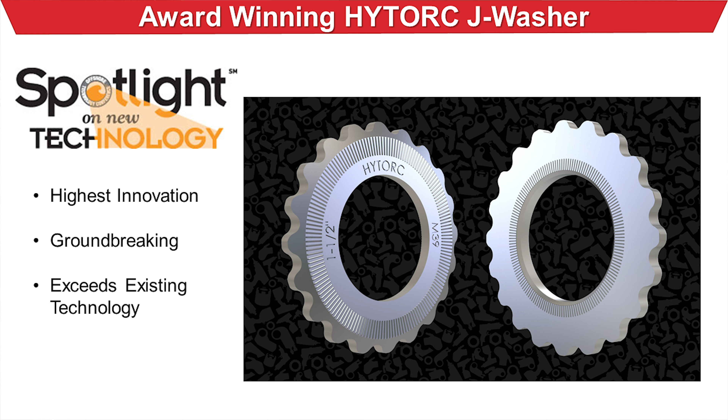Yeah, it's a product that we're really proud of, and it's actually our second Spotlight on New Technology Award. We won it for our LST battery tool in 2019, the last live show, and now we've won it for our washer, and it's a really prestigious award and one that we're extremely proud of as an organization.

Our team has put so much time and effort into developing these products that make a significant impact on industry. I mean, that's what we're all about. We take in feedback from our customers and put it into practice with our product development, with the support resources that we have. And it's just terrific to see it recognized by such a prestigious group.

To be surrounded by the who's who of companies in the oil and gas industry - it was a great experience, and we're truly honored by it. Two out of the last three years to bring home that piece of hardware.

Certainly impressive. Eric, let's learn more about the J-Washer. Take us through this and, of course, the benefits that it has for those customers that are using it. Yeah, as you can see on the screen here, it's showing just how it looks and its appearance.

You have on the left what many have become familiar with. This is our HYTORC washer system. And so just to give a little bit of background, we started making washers about 20 years ago or so. Our first iteration of the HYTORC washer was developed in the early 2000s.

The idea was how can we enhance the industrial bolting game? How can we improve things? Again, job safety, job quality, reducing job time, really just making bolting simpler and better. And so we developed a washer, and it was a big step forward.

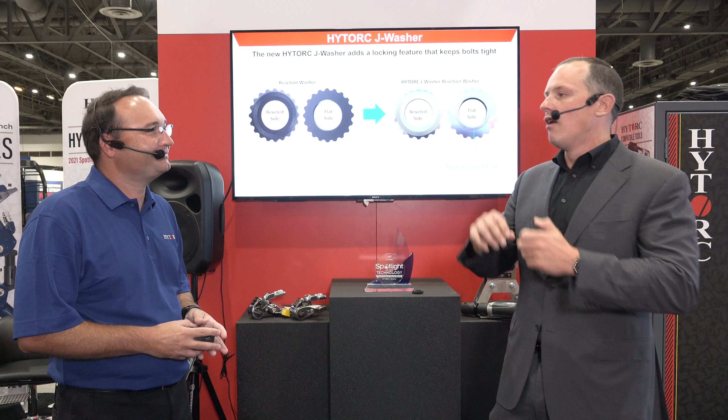It worked in conjunction with our tools. It was basically an accessory, and it allowed for you to remove the biggest hazard, the biggest source of frustration, the biggest pain in the neck in bolting - the reaction member. And that was something that was a big step forward.

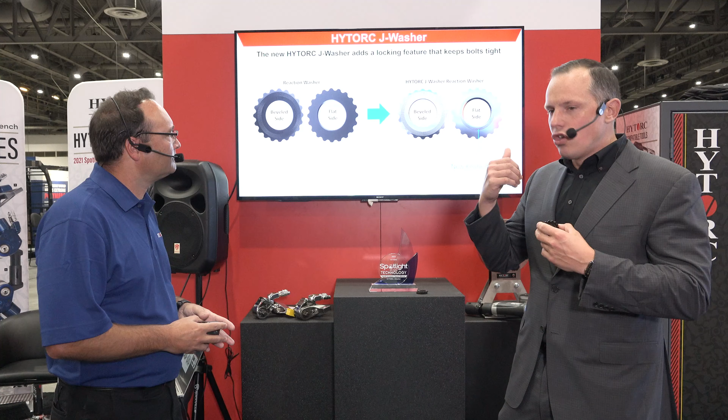And what we did over the corresponding 20 years was try to find ways to make it more practical, make it simpler for our customers to put it onto their jobs and onto their applications. And so a huge step forward occurred about 10 years ago with the product on the left there, which we call the reaction washer. That is what many have come to know as the HYTORC washer.

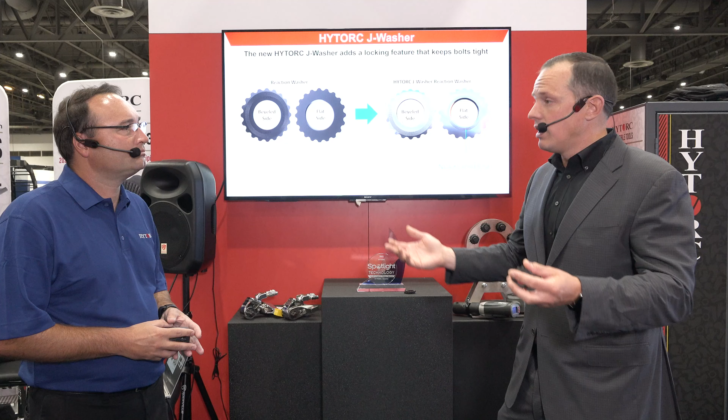It is a big hit within many industries, and for obvious reasons. It's a very simple, clean design. It's priced at a good level. It's very practical, and it enhances the work drastically. That's something we've been offering for the last 10 years, supporting our customers with it. We've got hundreds of thousands, millions installed around the globe, many of which are in the oil and gas industry, a big user of this washer.

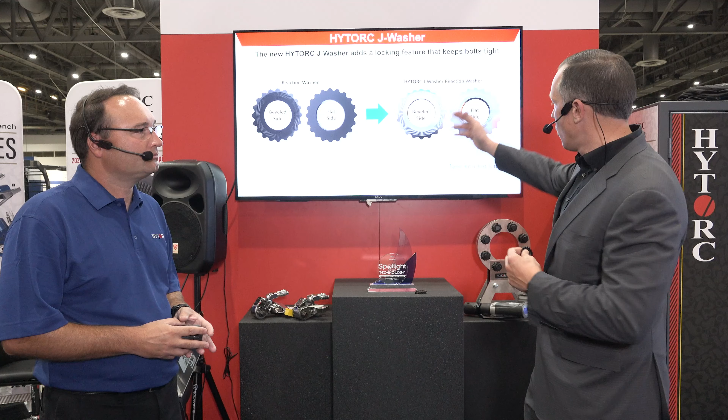But again, we're always listening, always trying to find ways to advance, get better, improve things. That is how we came to the J-Washer that we're showing here on the right, that I have in my hands. Upon first glance, it looks very similar to the HYTORC washer, and that's certainly the case. It's a similar design, a similar style.

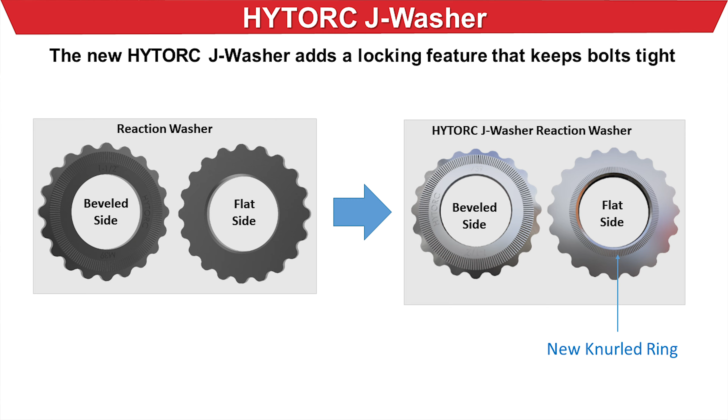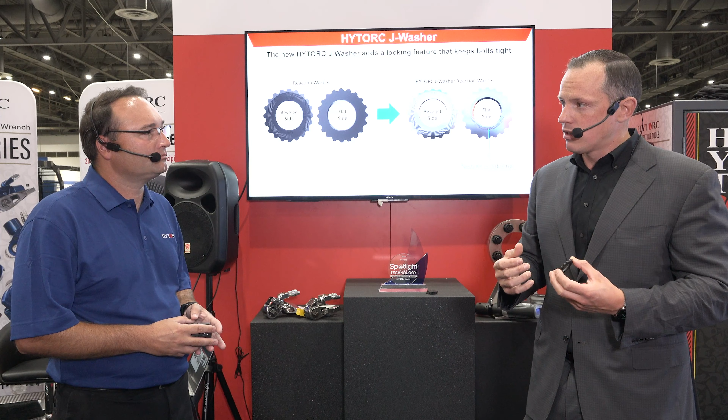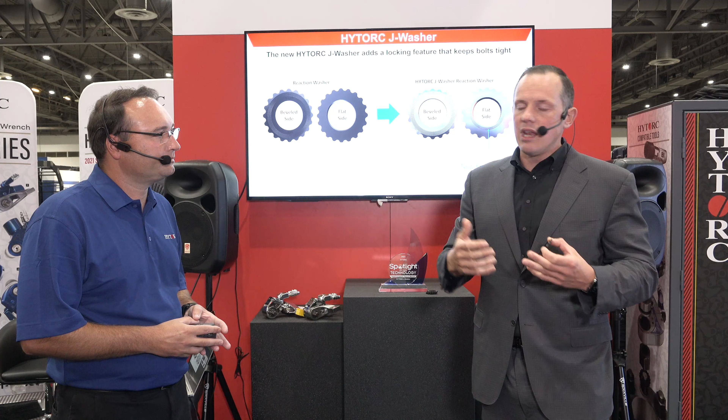The only difference you'll see is this ridge band up top. It's a very simple difference, perhaps you barely notice it, but it has a dramatic impact on the effects and benefits it brings to the equation. Simply put, it offers a locking mechanism. That ridge band enables us to lock that nut on top, ensuring it will not come loose under any and all circumstances.

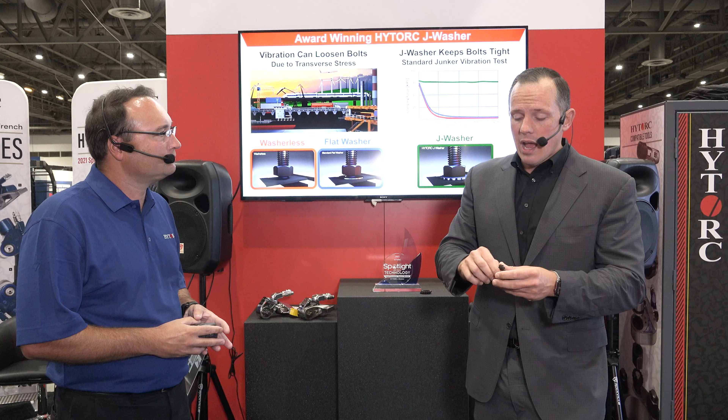So really that's what it all comes down to. We're taking the safety benefits, the job quality benefits, the job time reduction that we had with our previous HYTORC washers, and now adding a locking feature to it. There's conditions out there that your customers have to deal with day in and day out. Vibration is a big one. This was tested and proven to work even under the most extreme situations.

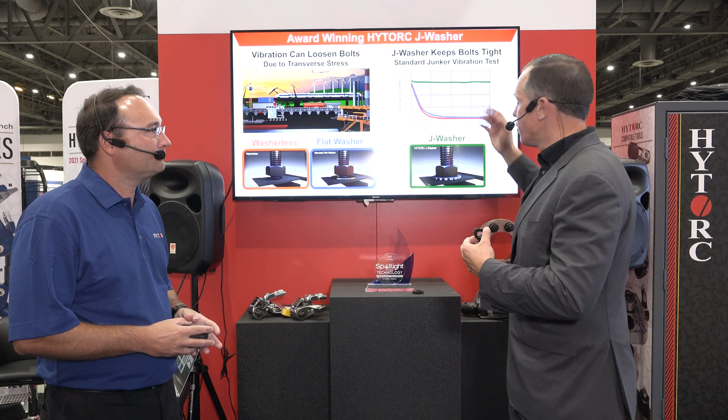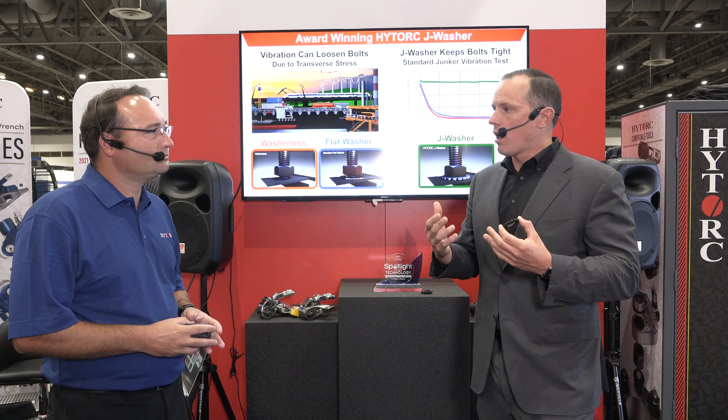We can call it a lock washer all we want, but it has to meet the standards that industry has set. There's a test known as the Junker vibration test that this product was put through to ensure it complied. And it more than complied, it exceeded the criteria set for a product to be a lock washer. That was something very important.

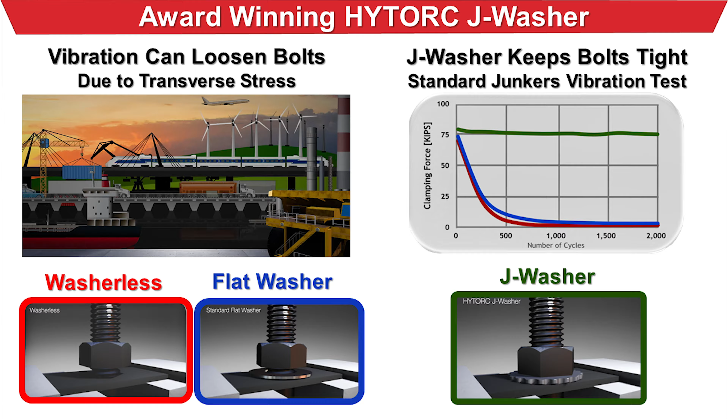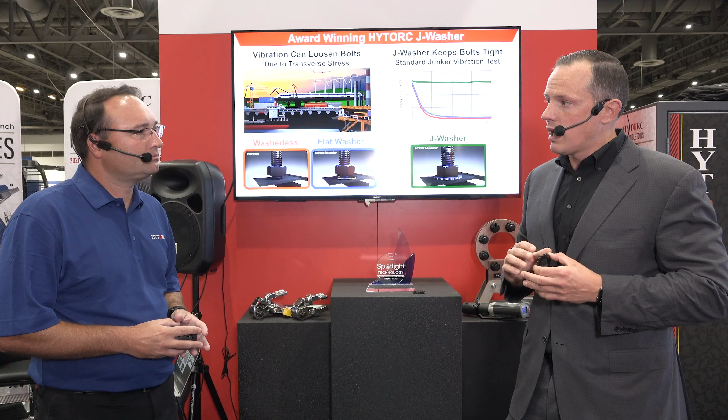You can see just by this simple graph what happens with a washerless or flat washer, and what happens with the J washer. It holds load under the severe vibration scenario, and that's important because vibration is present within many applications across all industries, particularly here in the oil and gas industry. This little, almost unnoticeable change can enhance your application, your bolted joint connection significantly, giving you that extra layer of assurance that those bolted joints will stay tight and the work will be intact for the time needed between maintenances.

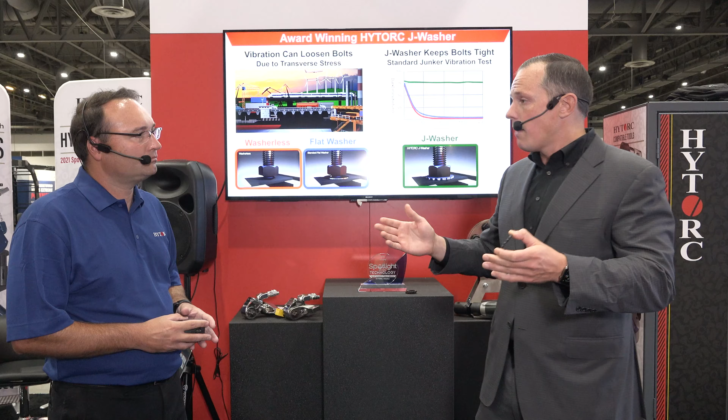That's job quality. You talk about job safety, obviously very, very important out there. It's what more and more companies are looking for, as they should. How does this enhance job safety? This does that. It does.

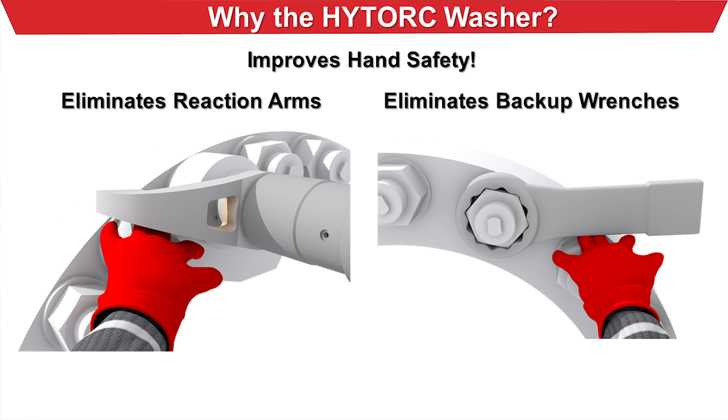The reaction member, as I said before, the reason we got into fasteners was to find a way to eliminate that reaction member. It is a cause of great frustration, a cause of great safety issues. It's a hazard, it really is, and it's something we wanted to get rid of. Of course you can operate these tools safely with a reaction member, many do all around the world every day, but it's just a headache at times, finding good reaction points, not damaging the equipment. It's something that if you can get away from it, you sure would like to.

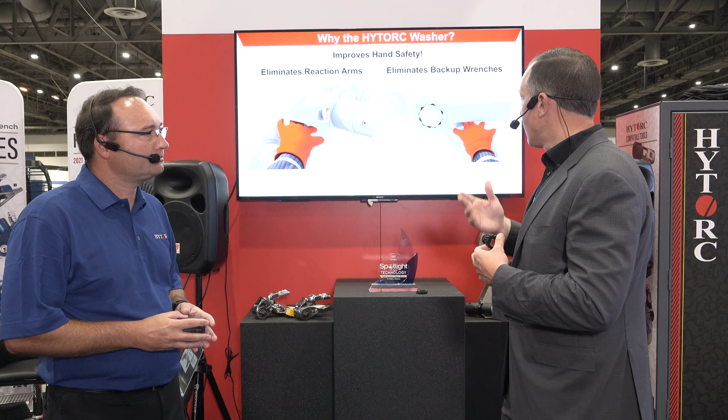That's exactly what we put our time and attention towards, not just the reaction member but also the backup wrench. You've got two sides to this equation, and both sides present a pinch point, present a hazard that you sure would like to get rid of if you can. Until recently, there wasn't a way to do it in a really practical fashion.

That's something extremely important to us, and that's what we try to develop. We're not just developing cool products that are unique and interesting, we think about practicality, about ease of use. We think about our customers, trying to develop something that actually makes a difference in their life, that makes sense for them, that ultimately delivers value. And safety is first and foremost in the benefits we're always trying to bring to the equation.

One of the things I know and hear feedback on is you guys are listening. There's situations out in the field that sometimes you may not envision. They're giving you those situations so you can create something that can help them through those situations. Obviously on the quality, time, job scheduling and safety as well, you guys have listened from day one.

Yeah, that's a hallmark of who we are as an organization. We're always taking in the feedback. We need that feedback. We work very closely with our customers, we truly partner up with them. The way we go about our business with customers is really an end-to-end type of thing. We're there working with them on the proposal side of things, doing a site survey, coming up with a proposal and recommendations. We get involved with training.

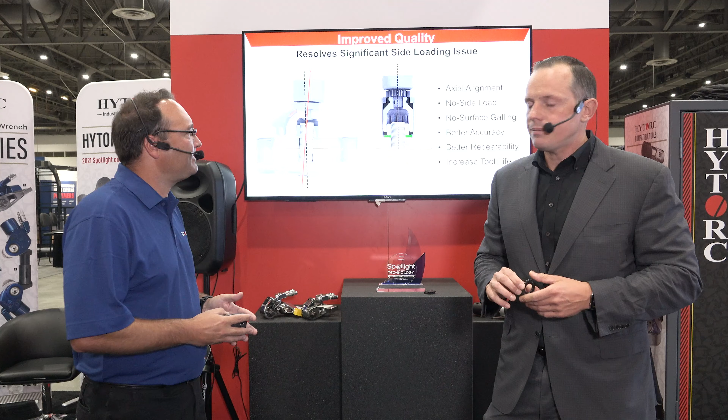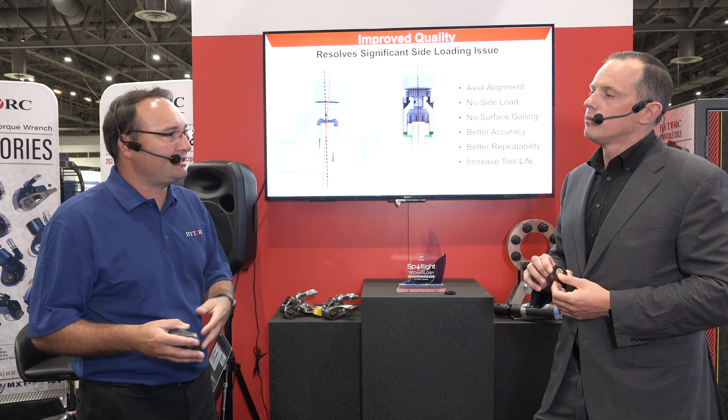As we talk about this, the award-winning Z-washer, I think it's important to realize all of those factors go into everything that's created. With the Z-washer, you went through the testing, you listened. We talked about the testing already, we talked about job safety and quality. It's all about the overall quality. Even when you factor in job scheduling and safety, it's about the quality. But here are specifics on that.

No side load, the axial alignment that comes with it. You went through this and made sure the boxes were checked. We did, and this is a good visual as far as what's going on with that bolted joint connection when you're using a standard reaction setup versus our washer setup. You can very clearly see what's happening — you're getting side load onto that connection, and then you're not. You have axial alignment, and that's beneficial for a variety of reasons.

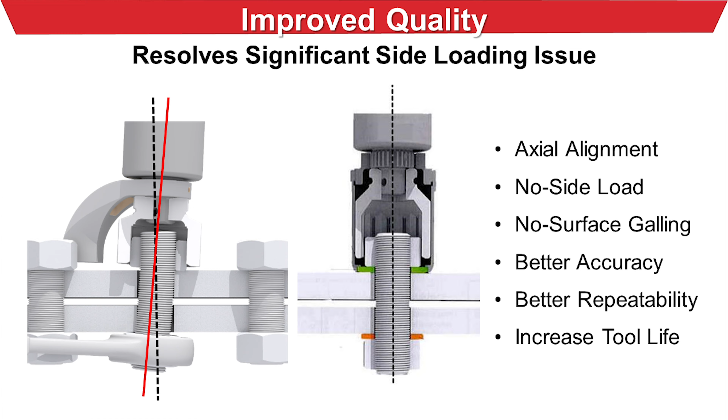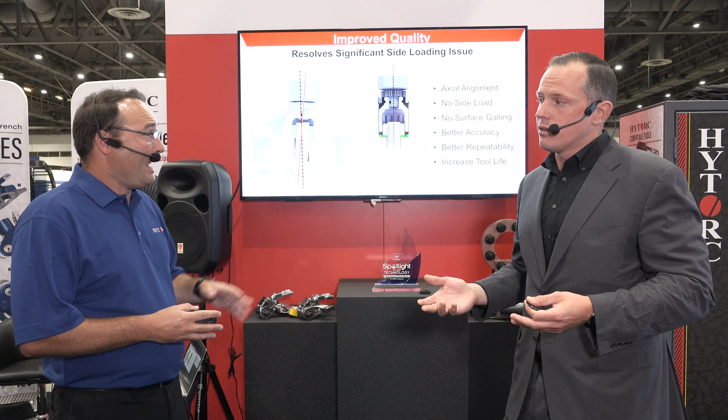You're talking about surface galling, bolt load inconsistencies, scatter across all the different bolts you're working on, and that can lead to problems. That can lead to leaks, that can lead to fugitive emissions. That was acceptable up to a point in the industry, and that's where you have to change the industry because of the impact it can have outside of that — whether it's safety, things failing, job quality. That was an acceptable standard. It's not an acceptable standard anymore.

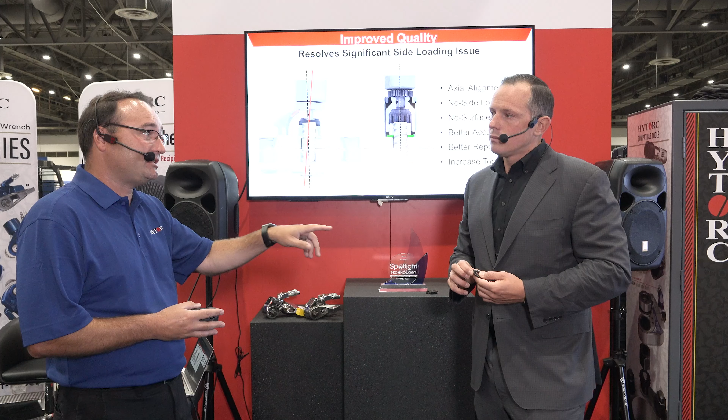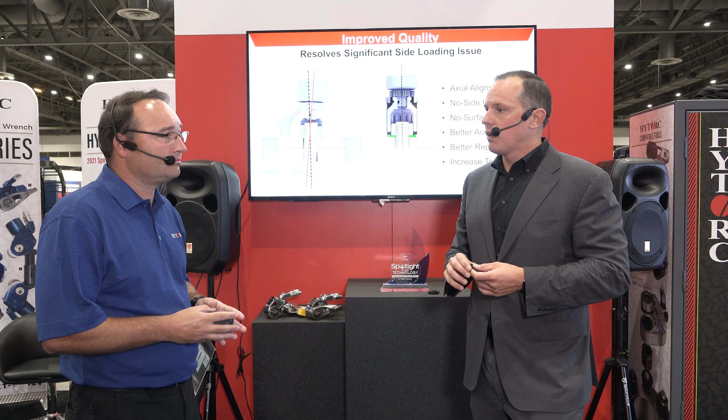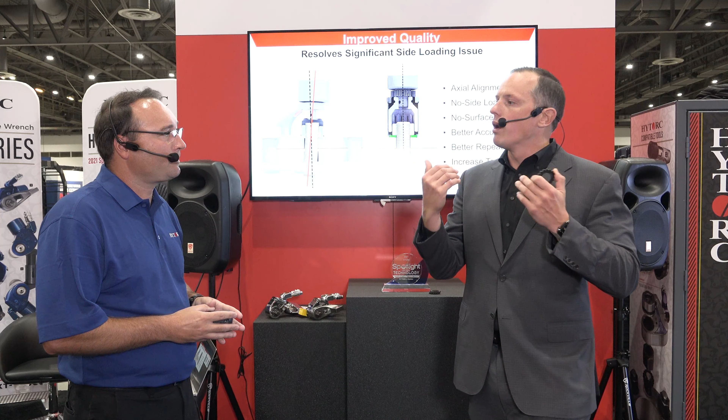No, it's certainly not. Again, we're trying to help our customers move things forward in a big way and enhance the game. Bolting is something that, when we work at it closely, when we look at all the different facets between the technology, the training, and the overall competency of the people using the equipment, we can bring it forward in a big way and get away from these problems of the past — the leakages, the safety hazards, these headaches, time-consuming things that occur.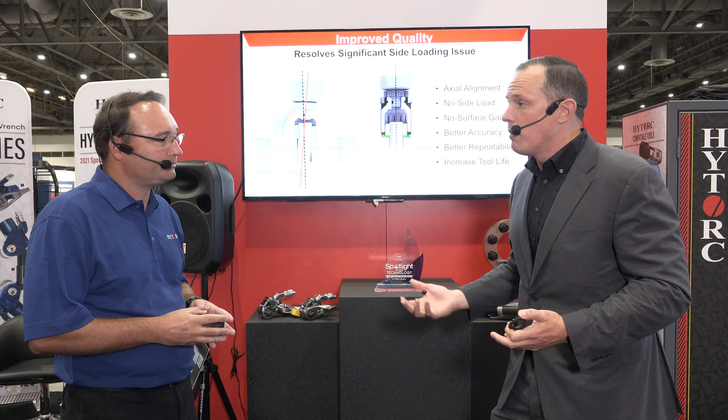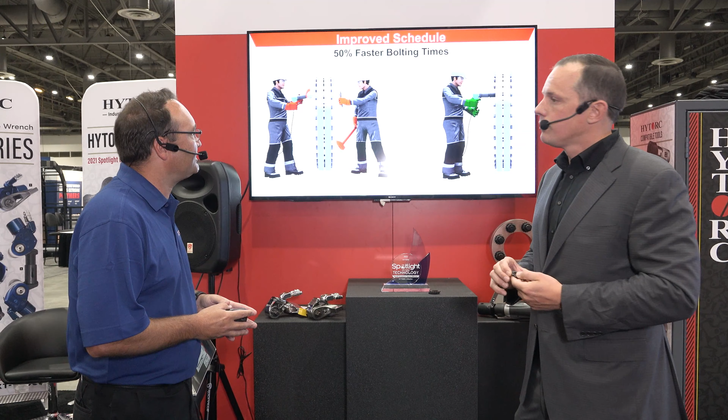We've got so many different areas that we can help out in to make this critical work so much more efficient. As we look at the schedule time, scheduling is part of that, job scheduling. How does the J-washer impact job scheduling?

We put right here 50% faster bolting times, and that's a big, bold statement, but we'll even exceed that in many cases, because it's not just about the hardware, it's not just about this fastener. It's about many other things that are involved with that.

We talked about the training, enhancing worker competency. That's a big step forward. We have courses that we work with ASME, the Qualified Bolting Specialist course. We work with OSHA and international groups all around the globe to provide high-level, comprehensive training courses that give you an incredible overview of how to safely and effectively go about your industrial bolting.

That's a big step. Then, of course, the technology. We talk about using procedural guidance, using multiple tools, four-tool systems, using different approaches to this can make all the difference in the world. So it's kind of a multi-pronged effect there that combined for drastic time savings.

You look there and it's just a one-man job, so manpower is down right there. Manpower means money, time means money, and right here you're seeing that. If you could show 50% off the top, well that's 50%. That comes down to your bottom line as well.

That's value, and that's very clean and easy to understand, and that's what we're showing in this graphic here. With these systems, one of the biggest things we wanted to do is just make it intuitive, make it simple, make bolting a lot simpler than it is, and get a lot of the guesswork out of it.

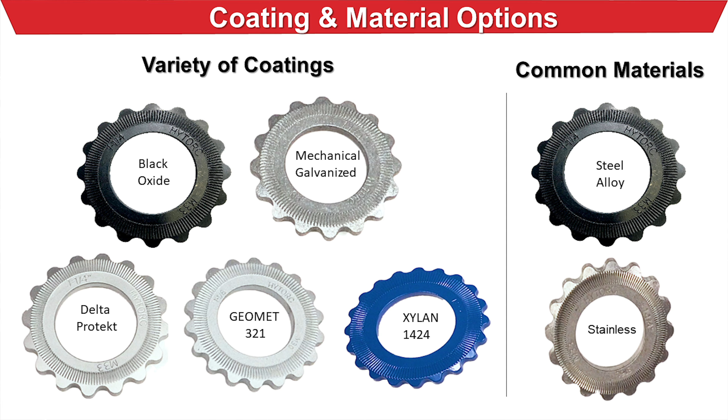As you can see the variety here, it's pretty straightforward, but obviously if we're dealing in all the different environments where there are critical bolted joints, like oil and gas for instance, we have to condition our products properly to ensure that they last, and we do. We work subsea, we work in any and all conditions, the coldest of the cold, the hottest of the hot, and everything in between.

And then you talk about standards. That's part of that too, what we were just talking about - what does it come in, how does it fit, and there's standards. You go back and you have to check the box because they have to meet needs as well, and that's where the standards come in.

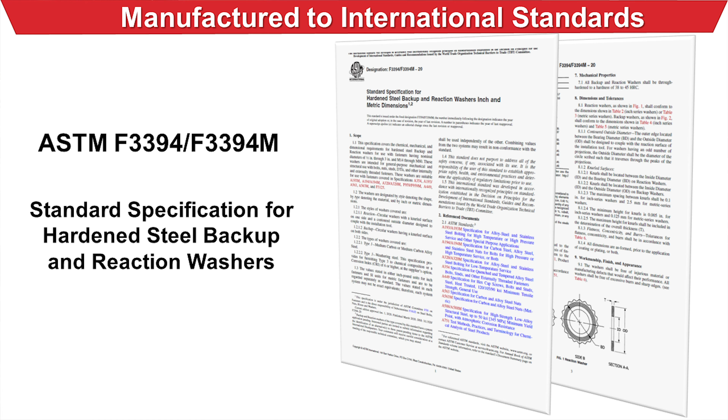We certainly want to ensure that it is recognized by the appropriate groups, by the appropriate standards bodies, and here's an example of it with ASTM, the F3394. This is a recent recognition that we received, and it's important because this is a product that we want our customers to have the utmost confidence in, and I think this backs it up and gives it the appropriate credibility that it deserves.

All right, and this is where somebody's kind of sitting back waiting for - all right, what's the catch here? I got to buy a new tool for this, right? Not the case with the J-washer.

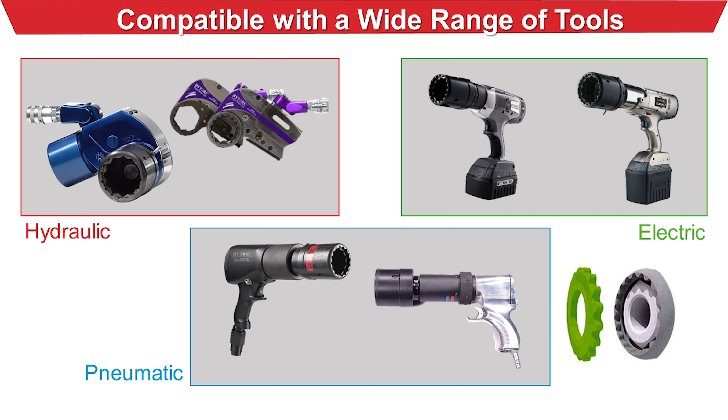No, you can use any of the latest HYTORC tooling that you have, whether it's the new MXT Plus or the Avanti series or the ICE series and the square drive tools, the Stealth series, any of our J-guns, any of our battery tools, any of our electric tools. That was important to us - we had to have it so you could use it with all of the different lines. There had to be versatility.

And then beyond that, even if you don't have our product, if you find yourself in a situation where you simply don't have our product, this will just behave as a standard hardened washer. To get the significant benefits of job safety and job quality and job time reduction, you do need to use our proprietary driver system with these tools on screen. But if you don't have it, that's okay too - you can work with other products and it will behave just as good as, or if not better than, a standard hardened washer.

Well, all these stars of the show, of course, the J-washer, the star of the show. But one of the topics that we're really talking about here at OTC is the digitalization that's going on in Industry 4.0. Yeah, it's an important topic, and it's one that we're showing off in a terrific way here.

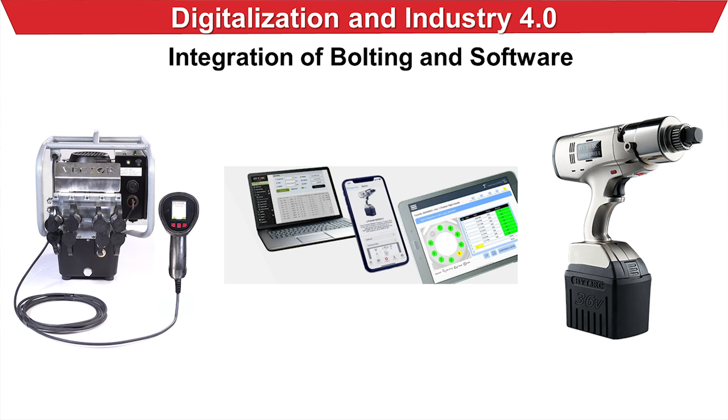We've got a couple of demos that we're doing with our LST tool, our Lithium Series 2 battery tool, as well as our Vector hydraulic system, where we're showing wireless data capturing. We're showing how we can go about this in a very simple and effective way. We want to give our customers total visualization as to what's going on, total transparency, give them that paper trail that they need to have that assurance that the work is done properly and effectively, and we take a lot of the guesswork out of it, and we can do it all.

We've got a great video on our website on YouTube that talks about a lot of this, that goes into all the different areas that we can and have worked on, and we look forward to talking with more of our customers this week. A lot of time has been spent on that, and rightfully so.

It's a really big step for industrial bolting, and when combined with the hardware technology, you've really got something special. We'll dive in here quick and run through probably the leader of digitalization, and that's the HYTORC Connect app. I know there's an application we can talk about with it too, but this was really leading the way on the technology side lately.

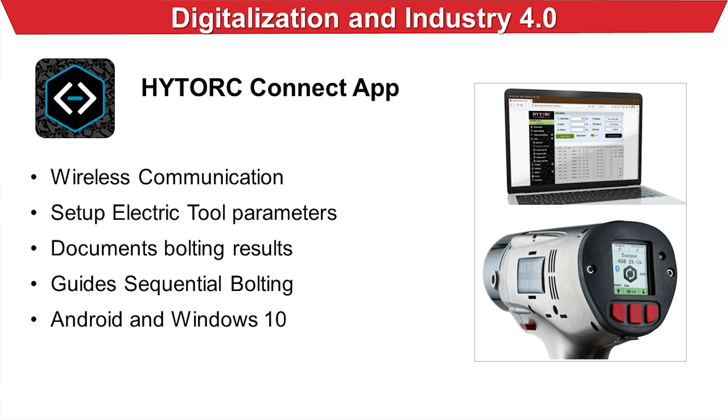Yeah, it's a terrific product. It's very simple. We're showing it off here. Works with our battery operated tool, and you could see all the features there. It's just straightforward. It's easy. It's intuitive, and that's what we wanted to come up with. Something that our customers can easily use and easily benefit from.

And an example of that, and as you think about in the oil and gas industry here at OTC, this is an actual application of how to use it. Yeah, we're showing just a good example of how one can use this and give one a sense of what it can do for them.

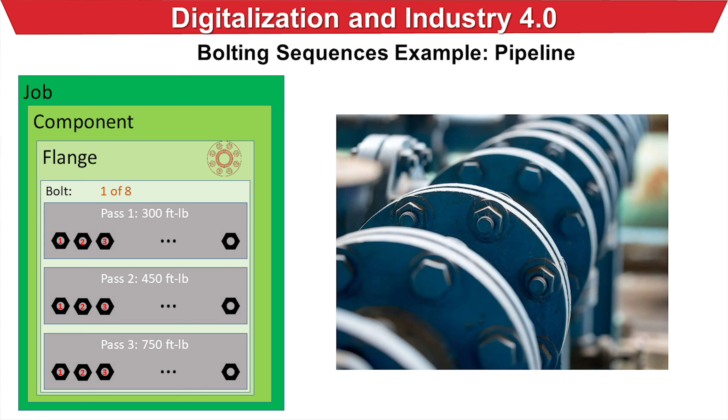It shows the different passes at the different torque requirements. Again, we're just trying to simplify things and make it easy on everyone, and then have that paper trail behind the scenes. It goes onto a computer, goes onto a tablet, goes up into the cloud, whatever it is you're looking to do, and you've got it forever.

Certainly tremendous to see. The HYTORC Bolting Manager app, this is another example of the digitalization that the industry is taking you there, so you better get there. We're there now. And for everybody else, this is an example of that.

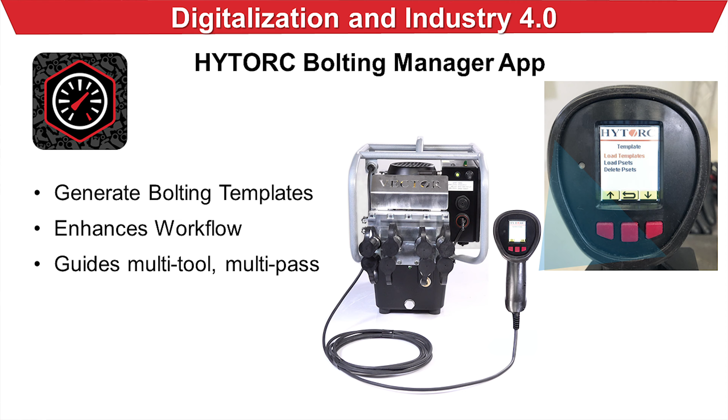Yeah, we work with our customers to develop these programs. As I mentioned, these apps, everything we do comes from feedback, and this was something our customers said would be important to them, would make a difference to them. And we, as it says here, generate bolting templates and help out with the workflow, make things more efficient.

It's right alongside of that the Connect app. With the sequencer, as we showed there, and it's something that works with our Vector system, as we're showing here, and it's a big step forward. It really is, and we're proud to show it off and provide demonstrations and really share it with the marketplace.

So if you want to impact job quality, job safety, job scheduling, what you all do, obviously there are solutions here at HYTORC. Eric, this has been tremendous.

OTC 2021, certainly great to see people out here this week as we wrap this up, and we put the bow on this one this week. Tremendous week out here. It sure is, and we're excited to be back, excited to be with everyone, and excited to show off our latest products.

We've got a number of different things that we're offering, new things that we're offering alongside of the J-Wash, our new hydraulic tool. So it's really been a fun week. It's been an exciting week. The energy is clear. It's obvious. People are motivated and excited to be back, and we couldn't be happier.